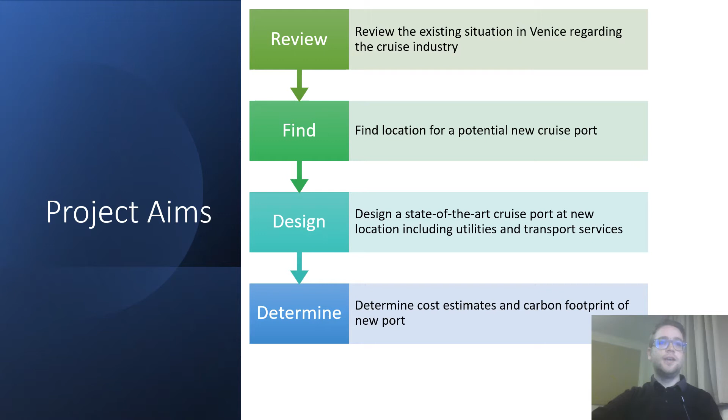So on this slide we have the aims of our project, first of which was to review the current situation in Venice regarding how cruise ships are viewed and the issues that are associated with their presence. Secondly, a new location must be found for the cruise port which can solve some of these issues. Thirdly, a new state-of-the-art cruise port will be designed to fit this location. And lastly, a financial and environmental assessment will be carried out on the project as a whole.

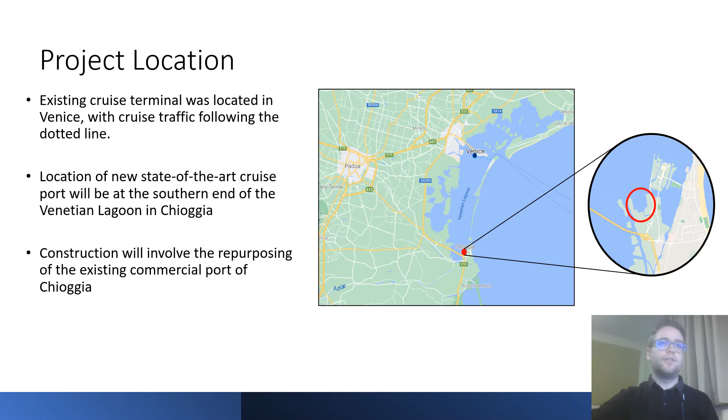The existing cruise terminal is located in Venice, with cruise traffic passing through the Giudecca Canal. This created several environmental and social issues for the residents in these areas. The new port will remain in the Venetian lagoon, but be located on the southern end in Chioggia, accessed through a separate inlet. This port is an existing commercial port which will be repurposed to serve cruise traffic. The next section will expand upon the construction of the cruise port.

The design of the port is outlined in the map shown and includes the construction of 5 new terminal structures, 4 of which are new builds and 1 being redevelopment of an existing warehouse in the port. These terminals will serve up to 7 cruise ships at maximum capacity, including the potential of docking Oasis-class cruise ships. Each terminal is paired with a service structure to be used to supply direct utilities to the cruise ships and terminals, as well as to provide storage for any luggage and cargo.

Across the port, there are 3 new parking lots for private and shuttle vehicles for transport to Venice or the local area. One of the key features of the design is the construction of a new 600-metre long pier section in the centre of that harbour. This better utilises the open harbour space to provide more berthing points for the port.

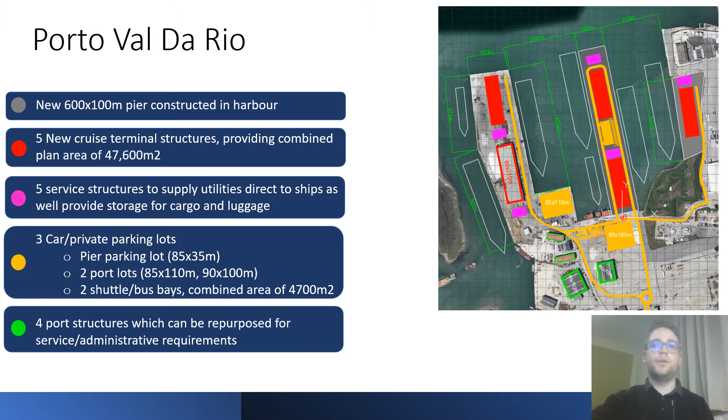The terminal itself is outlined in the floor plan shown on the right, with the ground floor being used for passenger management and embark/disembark systems, and the first floor being used for recreational services such as commercial shops, a restaurant and a viewing gallery. This floor plan is for the terminals on the pier section, as there are berthing points on either side of the pier and so require exits/entrances on each side of the terminal. The model below shows an example of how the pier section will look with the terminal structures included.

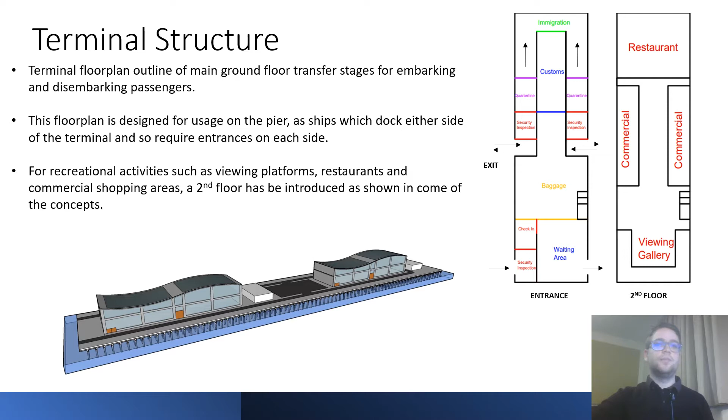All port decking and foundations will be constructed out of reinforced concrete, with the terminal structures being primarily manufactured out of high-grade steel members, with concrete steel composite decking and aluminium sheet cladding. Substantial sections of the exterior facing will feature glazing so to give wider viewing angles to the passengers of the port, as well as to provide more natural light for the interior of the structure.

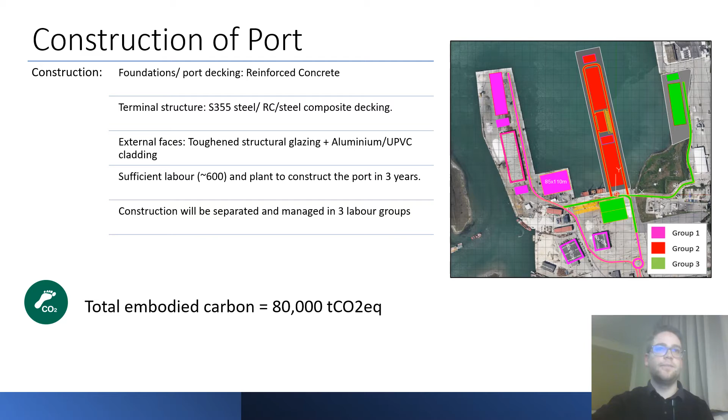The project will aim to be built in 3 years from the commencement of construction, with an average labour force of around 600 workers, with appropriate plant and equipment to ensure this can happen. The construction process itself will be split into 3 groups, each taking responsibility of a separate section of the port, as shown in the map to the right. Manaj now will talk about the provision of power to the port.

So in this next section, I'll be speaking about the way in which we're going to power the new proposed port. We're going to speak about the energy demands required, the energy storage required, as well as the energy sources that we plan to use. The first step was to narrow down the areas of interest for power consumption. This was chosen to be terminal buildings and an onshore power supply.

The reason an onshore power supply was required can be seen in 3 points. The EU have set a deadline of 2025 in which all ports must have a shore-to-ship connection. Onshore power supply reduces significant emissions, and finally there could be a fuel saving made for the cruise ships themselves. There is a conceptual layout that can be seen in the figure below.

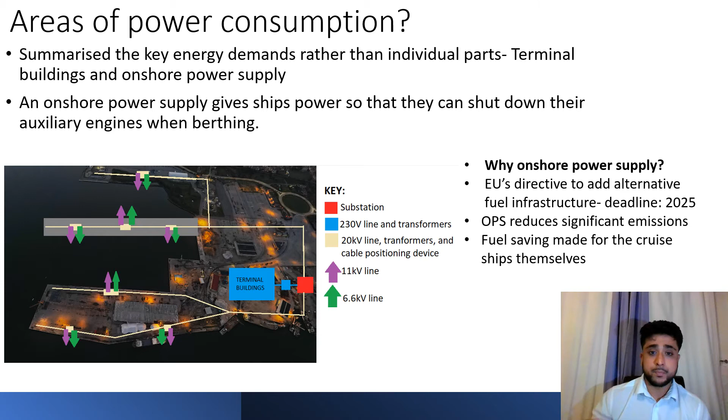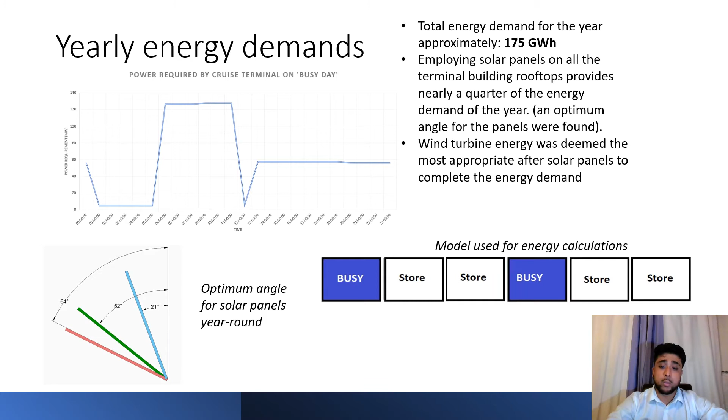The shipping pattern found in the current Venice port allowed for the creation of the graph and the model used for the energy calculation. The total energy demand throughout the whole year came to 175 gigawatt hours. If we were to put solar panels on all the terminal rooftops, it would be able to provide a quarter of the annual energy demand. The optimal angle for the solar panels can be seen as the green colour. And finally, wind turbine energy was deemed the most appropriate after solar panels.

Once it was deemed that wind energy was to be used, it was a matter of whether to create a whole new wind farm or to use an existing one. In the end, it was proposed that Romania 1 and 2 are to be used as they provide 800 megawatts of power at any one time.

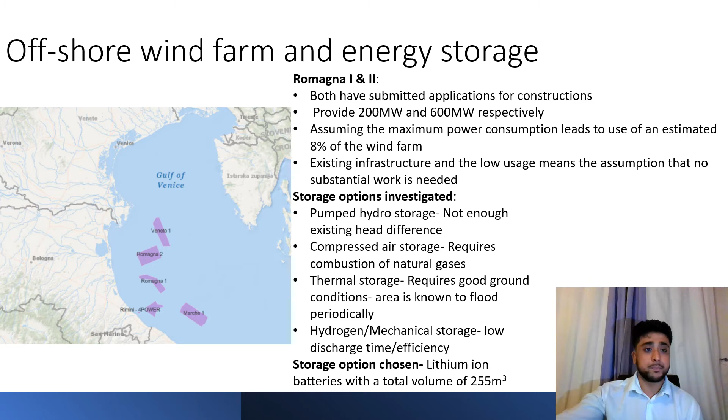Water is required for the cruise ship vessels, the terminal buildings, greening, and for firefighting. Drinking water is sourced using the local water network, which is designed to meet the demands of these requirements. Features can be added to this network to promote sustainability, including both rainwater for greening and seawater for air conditioning. The daily water consumption of all ships is 8,930 meters cubed.

The connection between the quayside and the ship is made using an international shore connection, which needs an outlet head of 25.1 meters to meet the level of consumption for the cruise ships. A pumping system is needed and is made up of 37 hygienic centrifugal pumps. A central position is chosen to house the pumps in the port.

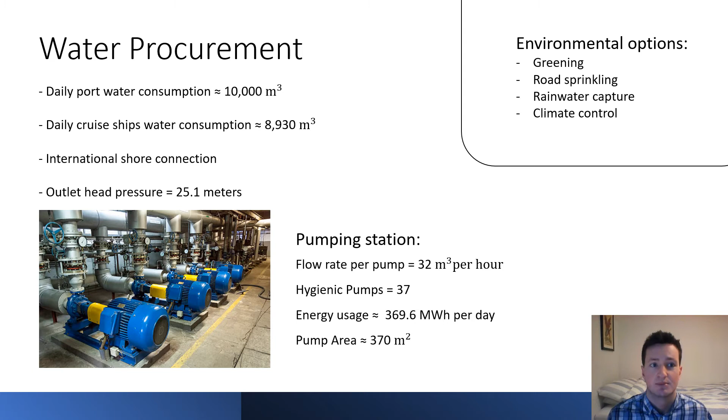The requirement for refueling at Chioggia is based upon the Poseidon Med II project and the GAINN4MOS project, which both promote the increased use of sustainable fuels in the Eastern Mediterranean and the Adriatic Sea. Due to the environmental impact of the current marine fuel used for most of the cruise ship industry and the availability of the fuel, liquefied natural gas, LNG, is chosen as a replacement fuel.

An offshore LNG facility in the Adriatic is used to source the fuel, wherein a bunkering ship collects it and, whilst docked in Chioggia, performs ship-to-ship transfers to each cruise ship. A modern LNG bunkering ship has a capacity of 5,800 meters cubed. For all cruise ships, the capacity is 5,700 meters cubed. Any excess fuel is transferred to the on-site storage facility and then to the road network to resell.

Advanced safety features are required due to the hazardous nature of LNG, as it is both stored at a cryogenic temperature and at a high pressure, whilst having significant fire hazard properties when exposed to either air or water. Next is the waste management.

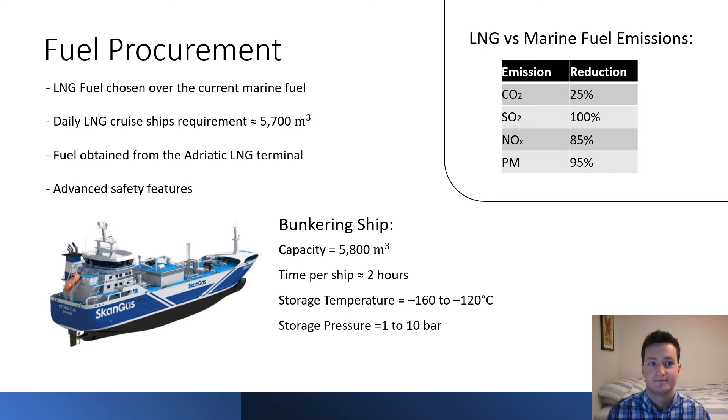So in this next section, I'll be talking about the waste management plan that we have put into place at Chioggia. The new port requires a waste management plan to help keep the port and the environment clean. The Port of Venice did not have its own treatment facility, instead it relied on service providers. However, when designing the new port, it was a requirement to have its own facility to satisfy certain laws and regulations such as the EU Directive 2019/883 and the MARPOL annexes which are set out by the International Maritime Organization.

Taking these laws into consideration, the Port of Chioggia will be able to process 5 different types of waste streams on site, whilst using a local service provider to collect one other type of waste. The waste management plan has been developed to meet the laws surrounding the seas and aims towards Sustainable Development Goal 14 to help preserve sea life.

The waste management plan provides some energy through the waste-to-energy facility, which can be used to power the waste management facility or can be used in the terminal buildings. The effluent water produced from the advanced water treatment system can be reused in grey water areas around the terminal. In the next section, Sean will talk about a smart passenger management system.

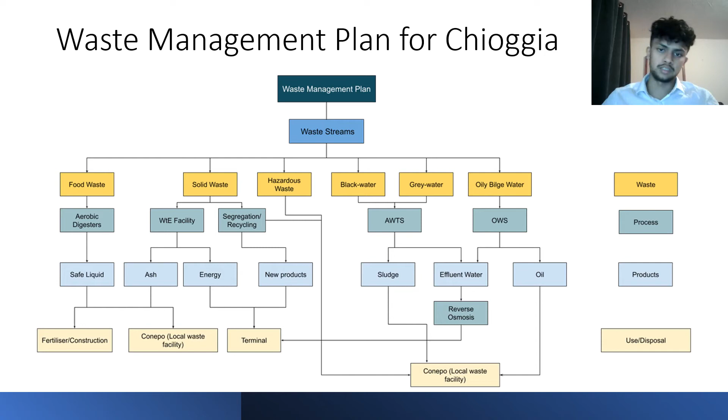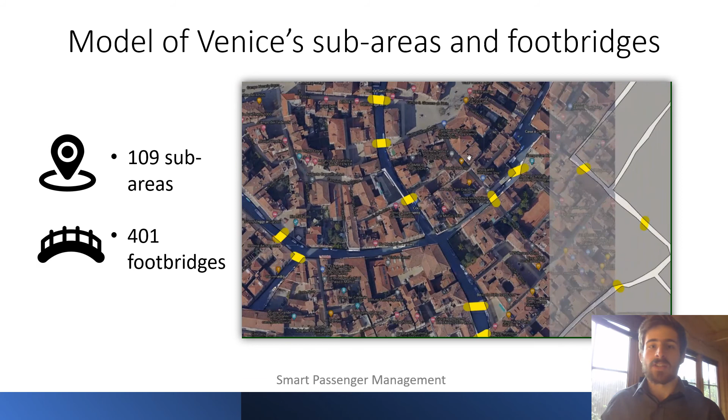The design solution uses access control to determine the movement of passengers across the 109 sub-areas and the 401 footbridges of Venice. This system consists of speed gates and a visitor management system, where there are 2 speed gates per footbridge to allow for bidirectional travel across each footbridge.

Furthermore, a redirection system is in place to disperse traffic across the city, and although the model has been suggested, it hasn't been created, as that is outside of the scope of this project. Redirection routes will be presented by way of redirection devices, where there will be 1 redirection device per footbridge.

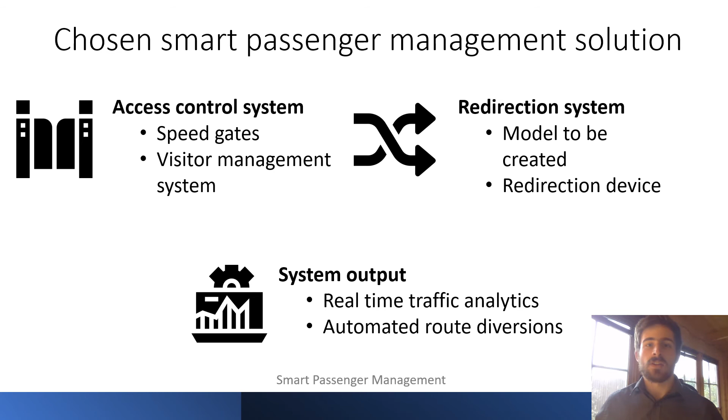And to conclude, the proposed system will produce real-time traffic analytics with a maximum error of 4.1%, which corresponds to when people are on gondolas and therefore unaccounted for in the city. Furthermore, the system will compute route diversions in real time to reduce traffic. I'm now going to pass you on to Zidane, who's going to talk through transport.

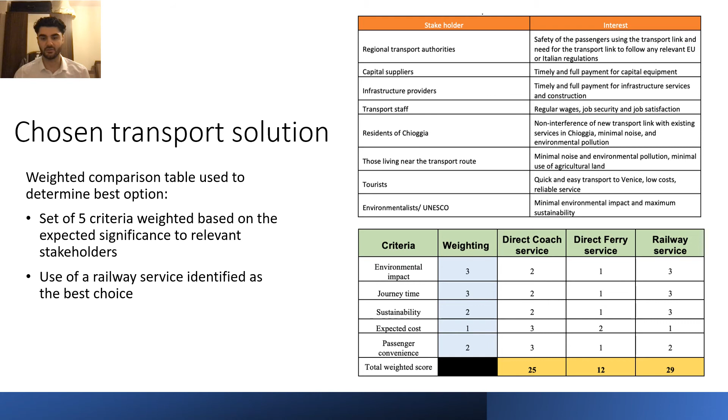Given the location of the new cruise terminal, the need for the provision of transport between Chioggia and Venice for tourists became a clear task. By considering the relevant stakeholders, who are mainly the tourists and those who live around Chioggia and along the transport route, 5 criteria were identified and weighted based on their expected significance to these stakeholders. Of the 3 potential transport solutions considered, the first being a direct ferry service between Chioggia and Venice, a direct coach service and a railway service, the railway option was found to be the most effective solution.

The use of hydrogen trains as part of the rail service was chosen as they aid in the overall objective of maximizing sustainability and reducing pollution and damage to the environment, as well as minimizing noise pollution along the rail route, as these trains are almost silent.

The rail route is 50 kilometers in length and has a total journey time of around 55 minutes, and it travels along the Brenta River between Chioggia and Padova, thus minimizing the use of urban areas and farmland. The rail route also utilizes existing rail infrastructure upon entry into Padova Station. Padova Station is used as a changeover station where tourists can take an express train into Venice.

The railway service uses 10 hydrogen-powered trains made by French company Alstom, while the coach service uses 5 electric coaches. Both are chosen due to them releasing 0 harmful emissions at the point of use. Additional infrastructure needed along the route includes 11 level crossings and 4 railway bridges.

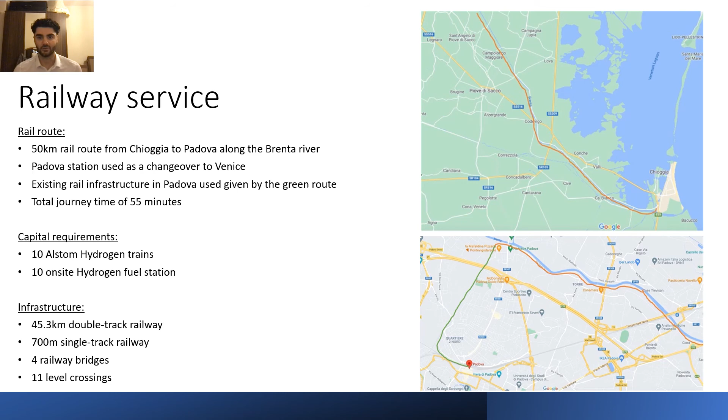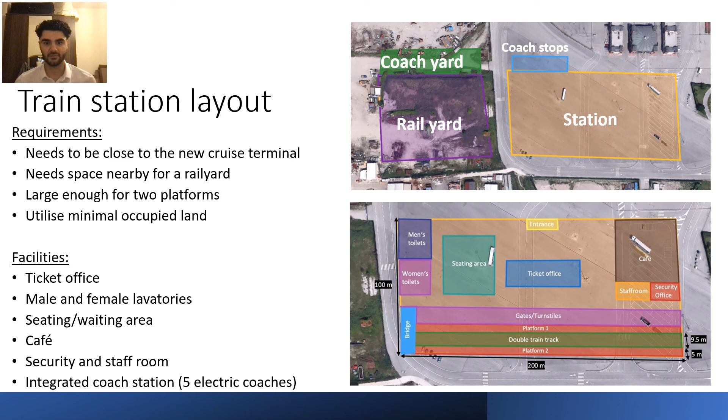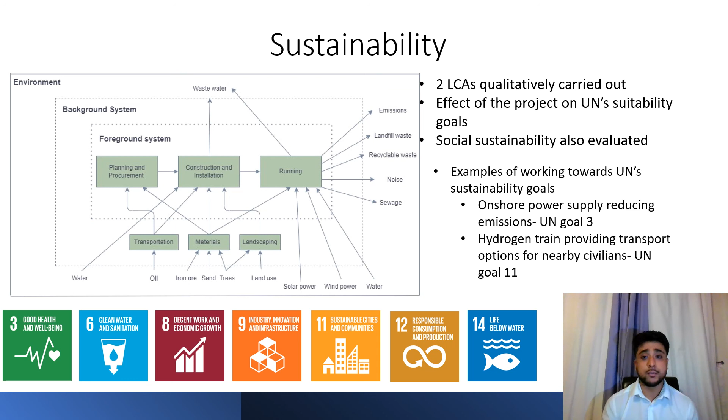And to give a few examples, an onshore power supply, we believe, develops UN goal number 3, as this reduces emissions of a previously commercial port. A hydrogen train would also develop UN goal number 11, as it provides transport for people nearby, not only the tourists. I'm now going to hand it over to Zidane, who will now conclude the project.

In conclusion, this project has successfully relocated the cruise ship terminal from Venice to Chioggia, avoiding the use of the Venetian lagoon. Detailed designs of the new terminal and docking areas, as well as the facilities within the terminal, have also been produced. An effective and environmentally friendly transport link via railway was chosen and designed between the new terminal and the city of Venice, and the sustainability of the entire project was critically analysed using 2 life cycle assessments.

The total cost of the project was estimated, and a financial analysis was carried out to determine the expected payback period of the project being 11 years.